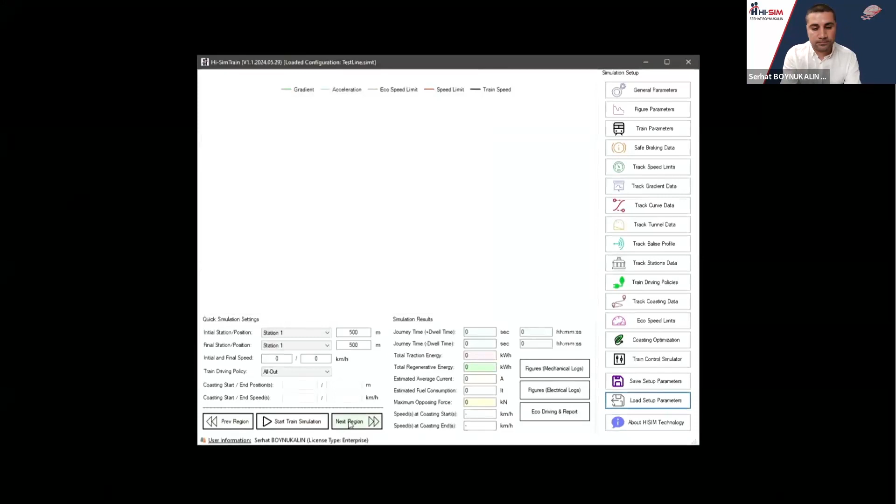Hello, today we will try to introduce the Hi-SimTrain application to you. The Hi-SimTrain application is a specialized program developed for electrification and operation optimization of railway vehicles. Before providing a detailed introduction to this program, it is beneficial to examine the creation of the necessary data sets for the operation of the program. First and foremost, determining the general parameters is crucial.

The sampling time of the application, the maximum simulation duration allowed for a single request, the metering precision of the application output, how closely the speed limits will be monitored, standard gravitational force, the starting point of the line, west, the ending point of the line, east, the elevation value of the starting point according to the direction of the line, selecting the direction of the line as west to east or east to west. After selecting the direction of the line, it is beneficial to check the elevation value because this value may vary depending on the direction of the simulation.

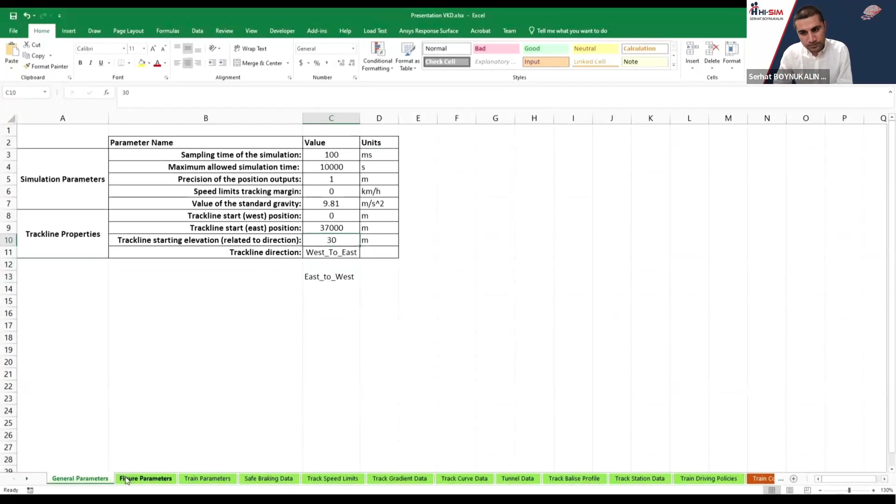The next area we need to examine is the section where detailed settings for the lines drawn on the screen graphs are located. In this area, frequent changes are not necessary. In fact, for your convenience, the most optimal color options and details for the vertical and horizontal axes have been set as default. Still, if you wish to make a change, there is a screen where you can modify the RGB values. Not only the RGB values, but also the modification of the texts on the X and Y axes is possible.

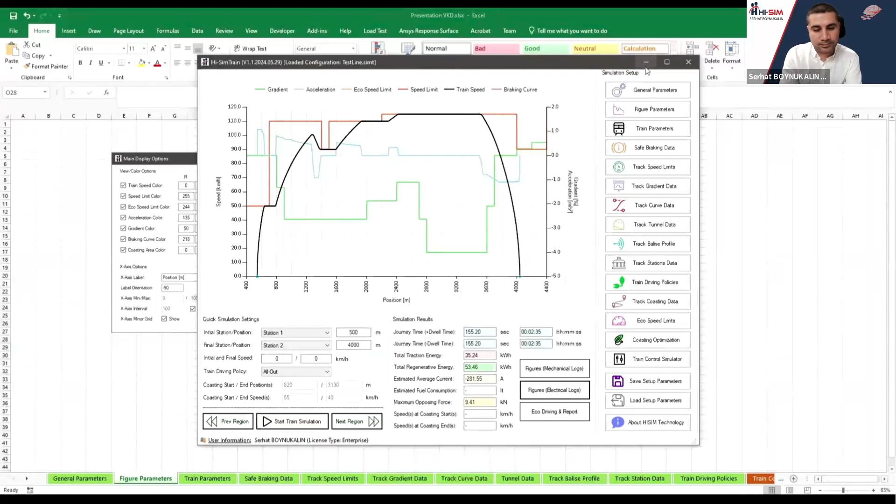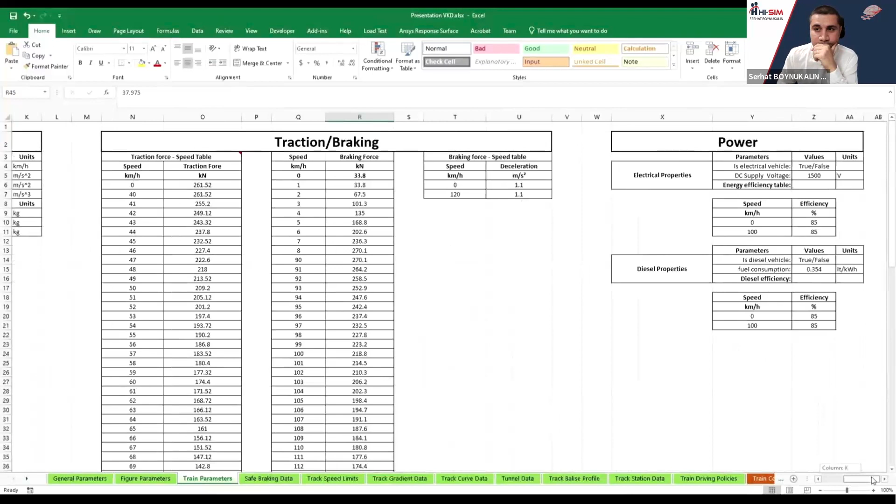The next section we need to review is the part containing the train parameters, which include the most crucial parameters. This section includes mechanical, movement, traction, braking, as well as power parameters. In the mechanical section, the structural parameters include information such as the length of the train, the frontal area of the train, and the number of cars and axles in the train.

In the mass parameters, it includes the mass of the locomotive, a logic variable indicating whether the adhesion effect will be considered or not, the total mass of the train in the simulation, the empty train mass, the maximum load the train can carry, and the percentage value of the mass rotation factor.

Additionally, the train parameters also enable a copy-paste feature that facilitates the easy transfer of train data between two different Hi-SimTrain applications. In the Performance Parameters tab under Movement Variables, it allows inputting the maximum speed, acceleration rate, deceleration rate, and the comfort factor. In the Mass Parameters, there is a field that takes input data dependent on the Davis coefficients AC0, AC1, and AC2.

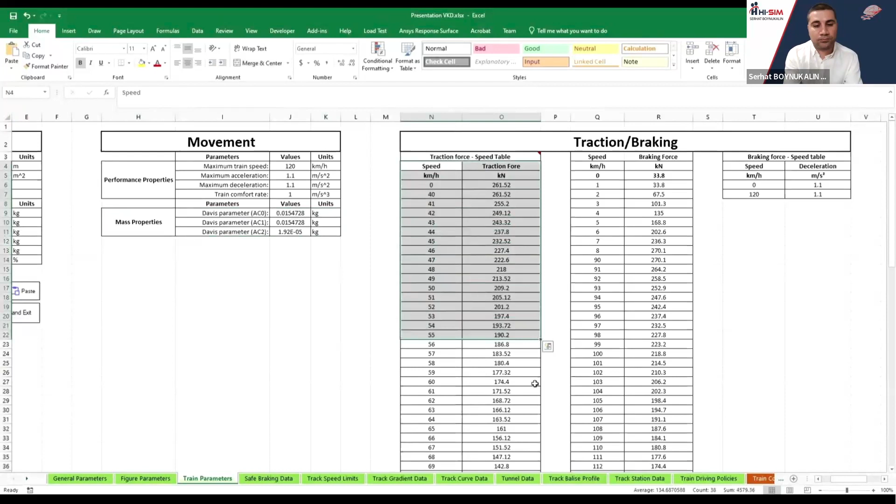The next input field is where train acceleration and braking parameters are entered. Firstly, the maximum traction force that the train can apply corresponding to speed must be prepared for the program in a tabular form. Following that, similarly, the maximum braking force that can be applied corresponding to speed must be prepared for the program in tabular form.

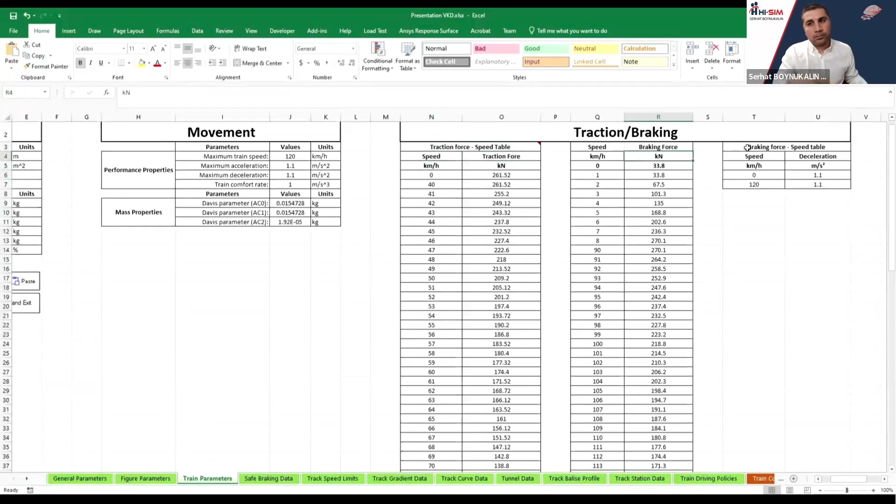Here, instead of the maximum force that the train can apply corresponding to speed, if provided by the manufacturer, the acceleration value corresponding to speed can also be entered into the program in tabular form. Finally, in this field, the braking deceleration value corresponding to speed can be entered as shown. If there is detailed information regarding the braking deceleration value corresponding to speed, it may be prepared for the application as a table.

When looking at the inputs for power values in the train parameters, if the train is selected as electric, voltage value and efficiency data based on the vehicle's speed should be entered for energy calculations. In the case where the vehicle's diesel model is selected, diesel fuel consumption and efficiency data should be entered in a similar manner.

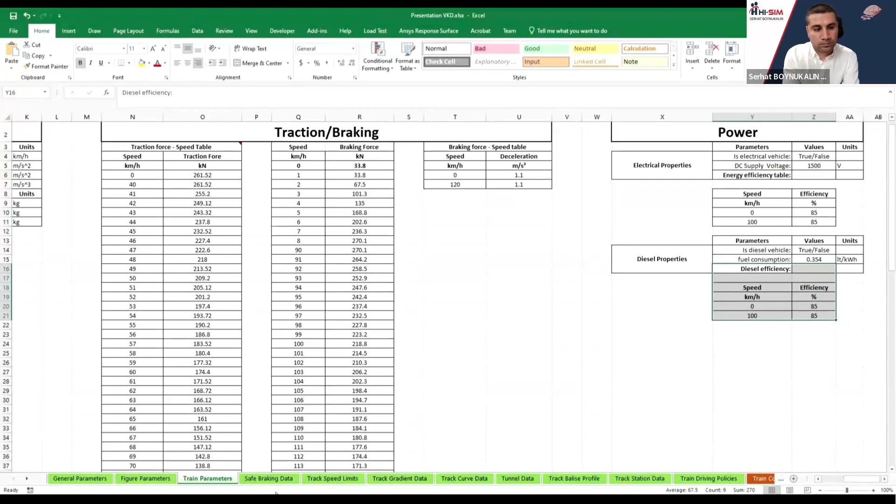The next data entry area is where safe braking models are selected, and the necessary data is entered when required. Firstly, there are three types of braking models. The first one is a local algorithm that approaches speed limits as closely as possible to the vehicle limits without using any braking model. The second model is for CBTC systems, and the third model is for ERTMS systems, defined according to the subset 026 standard.

In the braking model defined for CBTC systems, the following parameters need to be entered as a table: runaway time, coasting time, position uncertainty, speed uncertainty ratio, whether the speed will be normalized or not, and the track speed limit along with the gradient acceleration data.

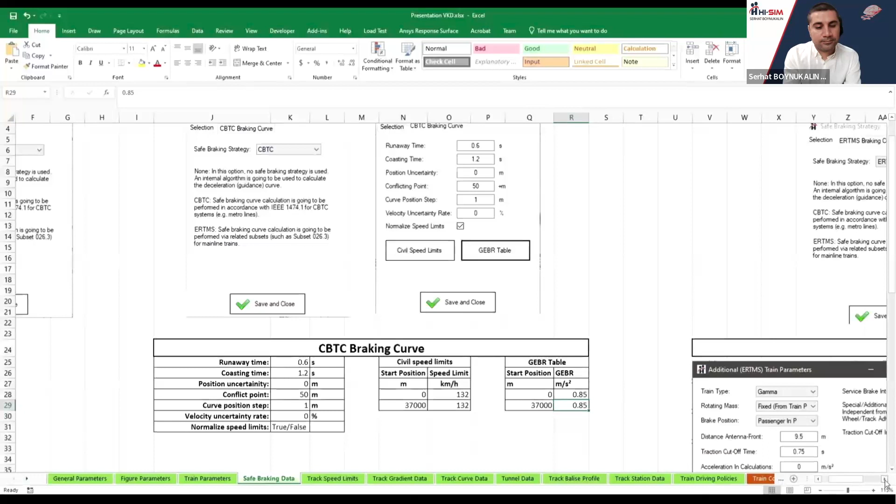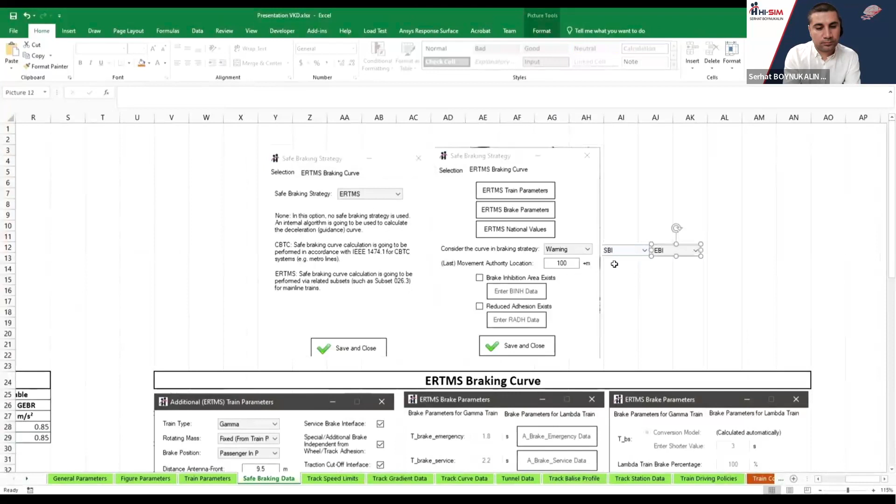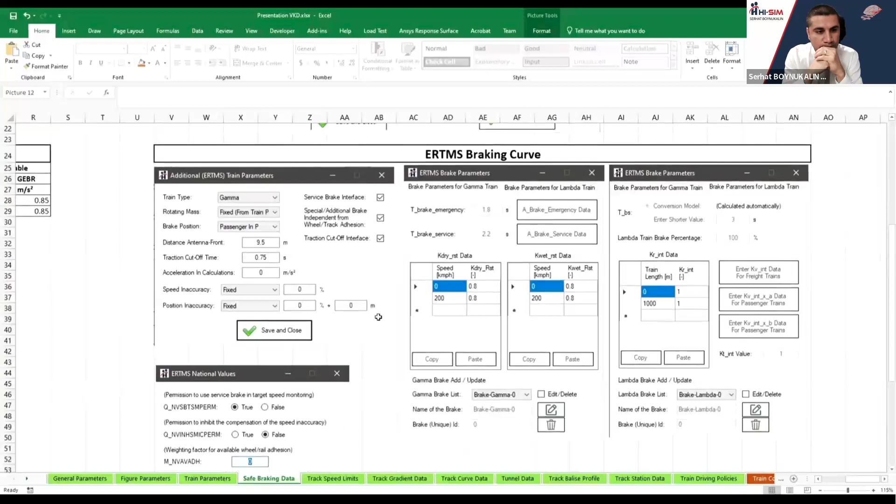In the ERTMS section, there are detailed parameters, each of which affects the output of the application. It can be selected whether the train will follow the warning, service braking, or emergency braking strategy. The train parameters section contains many variables within itself. Similarly, braking parameters and national parameters contain different variables. Each of these should be carefully selected.

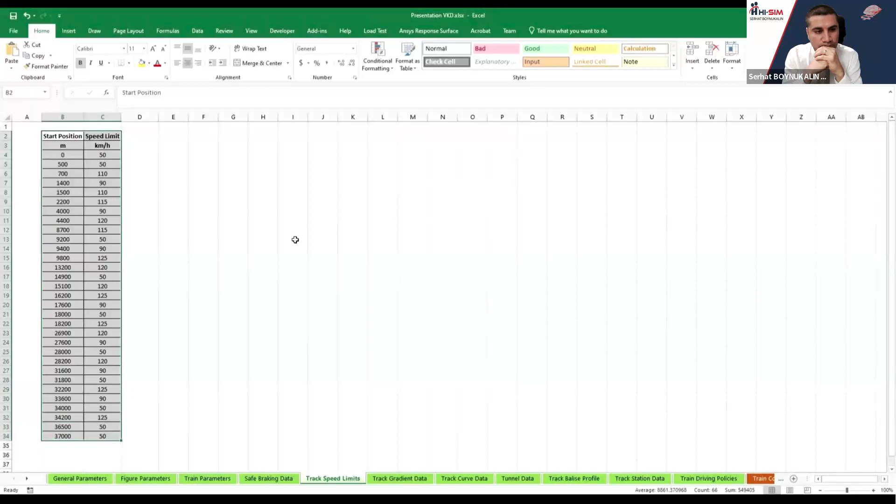The next data table is our table containing the speed limits of the line, which are generally determined during the design phase. Here, for each section of the line, the maximum speed at which vehicles can move is given in relation to the distance of the track. The data can be easily transferred into the application using the copy-paste method. It should be noted that this table should only change if the track line is physically modified, which is not expected in general. Our next table is the track curve data table.

In this table, where curves on the track are entered based on radii, if the vehicle is moving on a straight track, a very large curve value is entered to perform calculations. In our next data table, the variation of tunnel coefficient, depending on the meter, is entered into the table. This value can be selected between 1 and 2. When 1 is entered, it means that tunnel effect will not be taken into account. When 2 is entered, it should be known that the tunnel resistance will be considered maximum. Additionally, tunnel data can also be entered in a segmented manner.

Our next table is the track balises and their location accuracy data table. In ERTMS-based simulations, this data is crucial. It can be ignored in simulations where CBTC or internal braking protocol is considered.

Our next table is the table containing station data. In this table, the long name of the station, the short name, the direction of movement, the start, end, and middle points of the station, the minimum travel time, the travel time in full power mode, and the maximum travel time, how long it can go in eco mode, are entered as inputs, along with the waiting times at the station.

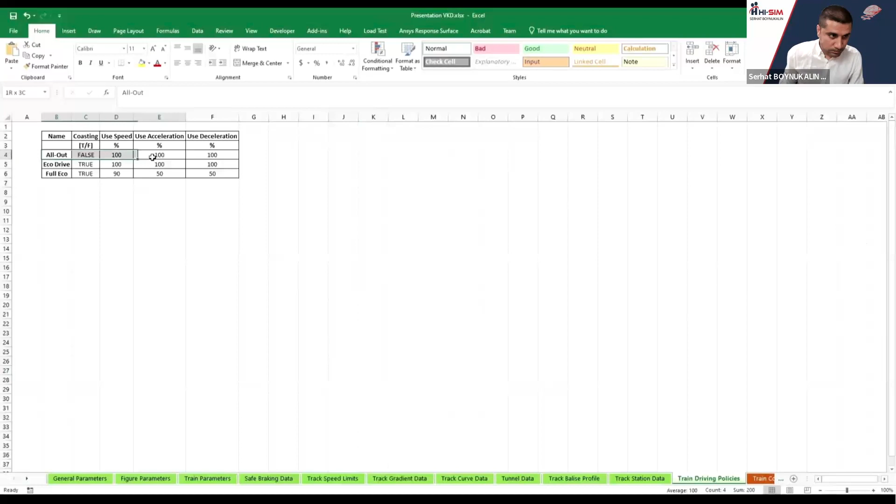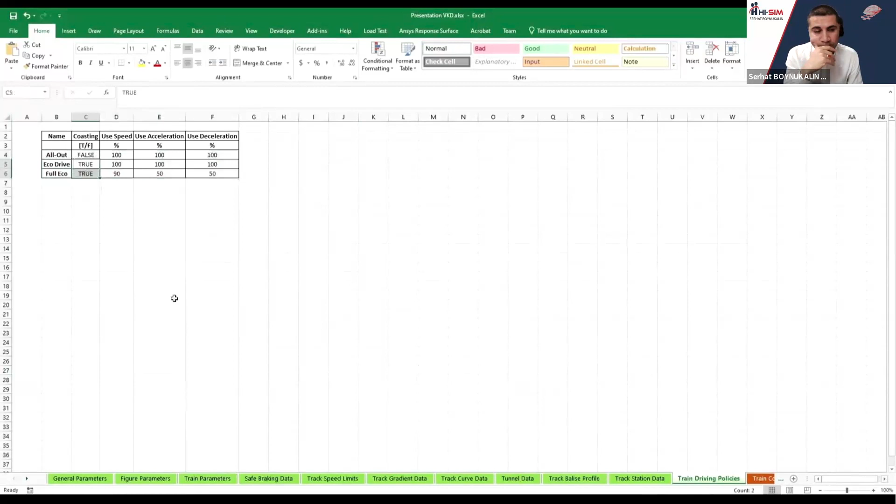In this table, the details of how the train's speed, acceleration rate, deceleration rate, and coasting parameters will be used are determined. The percentage at which speed, acceleration rate, and deceleration rate will be applied, as well as whether coasting mode will be enabled, can be selected.

In full eco mode, the speed, acceleration rate, and deceleration rate might be restricted compared to other modes, as shown in the table. This work shows the progress of data book preparation. Thank you for your listening.

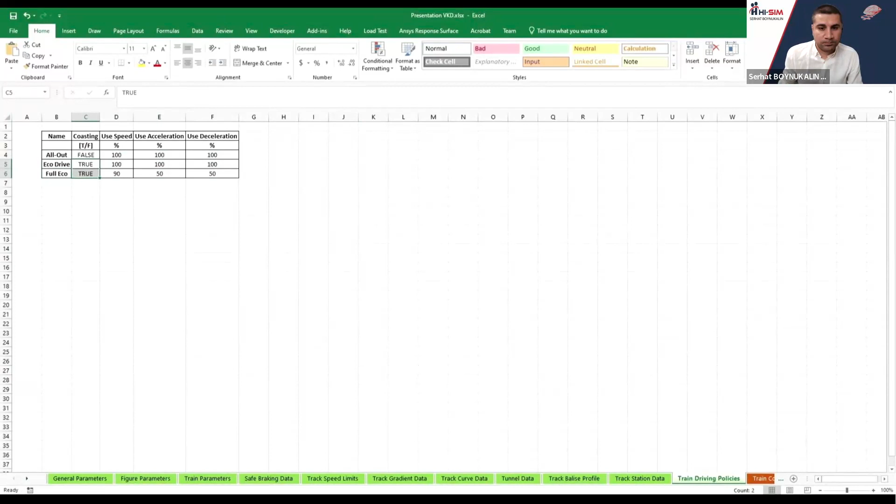Now we have shown you the necessary data requirements for the application. In case you do not have any questions, we will start presenting a demo, a video demonstration of how to basically use the application.

Hello, everyone. We will examine the general parameters, train and track data, coasting, and assess the all-out and eco performance modes for the entire line.

First things first, let's load a config file created based on the databook file and see all the data on the application. Here are the general parameters, and you might select the direction of the line. This properties for the scope visualizer options.

You can select any color that you want that will change the related graph color immediately. Also, you might modify the graph axis.

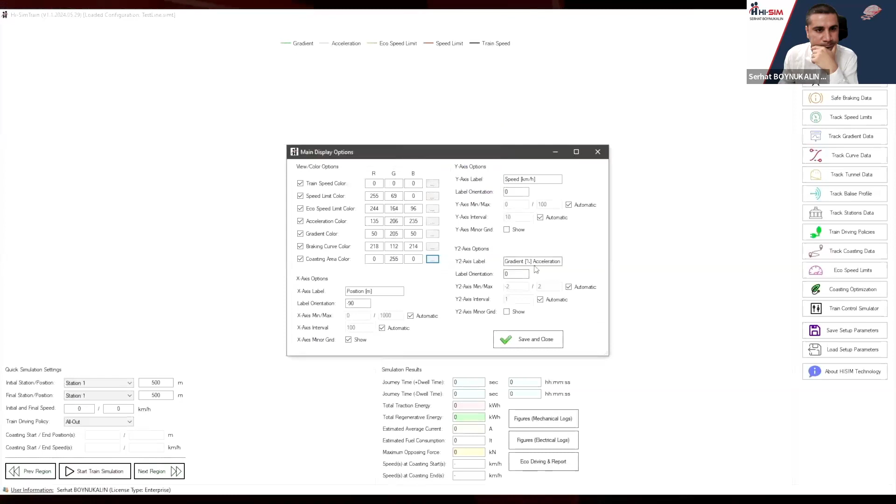The following window shows the train properties. As shown in the databook file, train properties consist of mechanical, movement, traction braking, and power. Also, the train properties might be copied and pasted like we did to send to another Hi-SimTrain application.

A traction force versus speed table or acceleration versus speed table for the traction side is possible. We preferred traction forces versus speed table in this config file. We have an excellent property here to help optimize traction force power usage, which you might like to use in case a train loses one of its engines.

For example, in case a train loses one of two engines, we can write here 50% to simulate half the power of the traction force. Also, here is the braking force versus speed table, and here is the deceleration versus speed table.

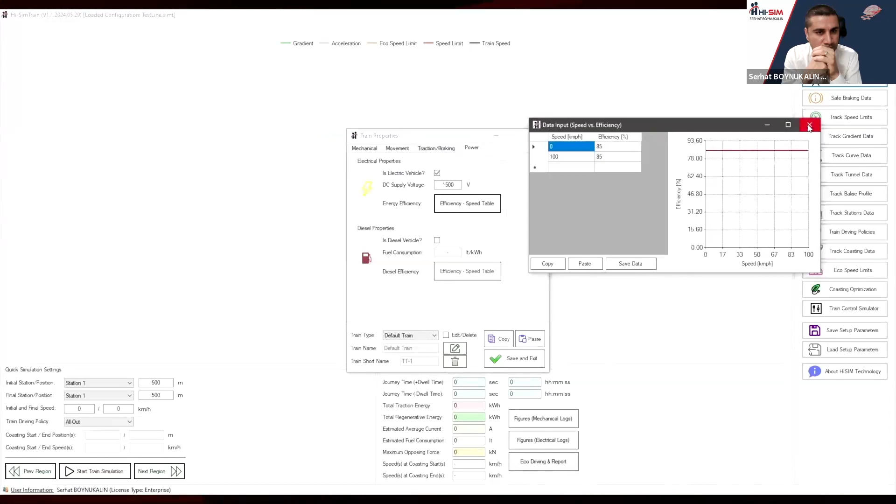In the power section, you have the option to choose between electrical or diesel power sources. Each option comes with its own set of efficiency tables, allowing you to make an informed decision based on the performance and efficiency metrics provided.

The next property is safe braking data, which allows the selection of internal CBTC or ERTMS braking curve algorithms.

Here are the CBTC properties and data tables. Speed limits and GEBR tables might be modified related to the project.

Let's go into detail on the ERTMS parameters. Here are the ERTMS train parameters. Here are ERTMS brake parameters for gamma trains, which consist of multiple parameters and tables.

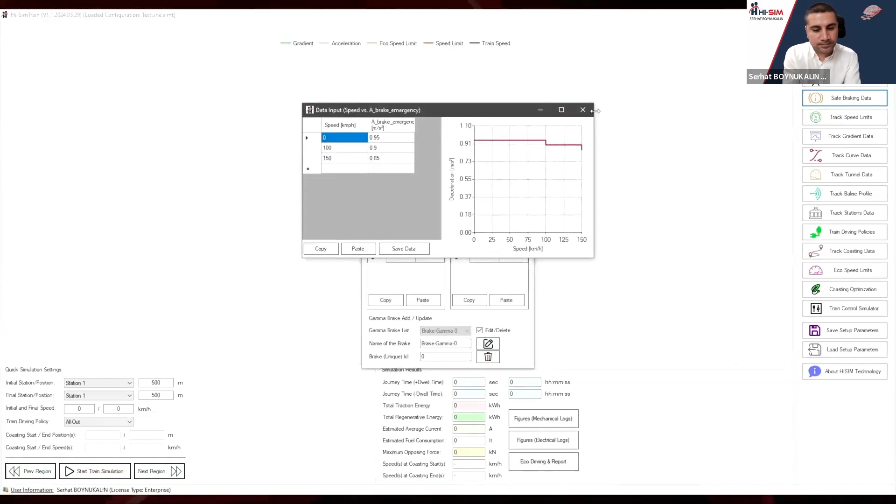It can be modified by selecting the Edit checkbox. A brake emergency data and a brake service data table are entered in tabular form. In case the edit is finished, don't forget to uncheck the Edit checkbox.

Here are ERTMS brake parameters for lambda trains, which consist of multiple parameters and tables. The displayed content is in an organized tabular format. This layout enhances readability and emphasizes the functionality that allows users to effortlessly copy and paste all related data directly into this interface.

Here is another ERTMS dataset, national values, which can be modified easily. It is supported to simulate warning, service brake, or emergency brake algorithms for braking curve calculations.

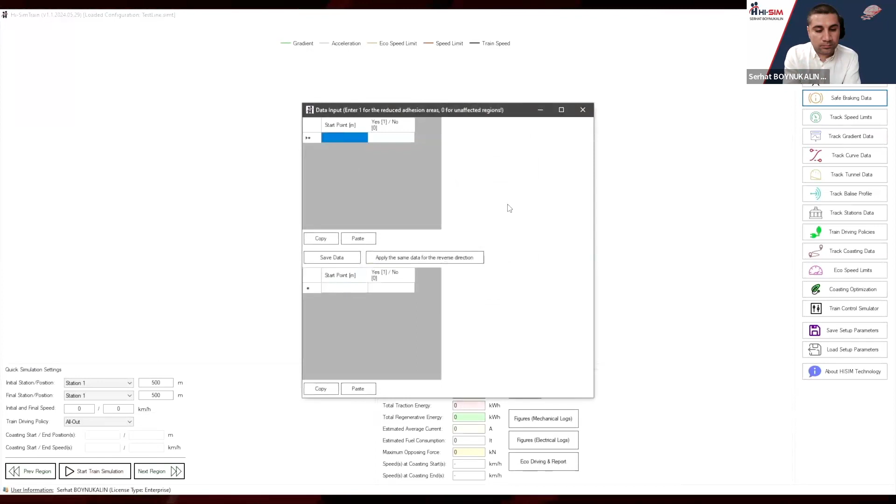In case of needs of brake inhibition and reduced adhesion properties, all related data needed to be prepared in tabular form. This was a quick check for ERTMS properties. We will test it in detail, or you might test it on your own too.

Let's dive into trackside data by starting with track speed limits. The position versus speed restriction information is clearly organized in a table format.

If you have a single line and want to reverse all the data to simulate the reverse side, there is an easy solution for this case. Before I show you that, remember to select the reverse side selection in the general parameters and save it.

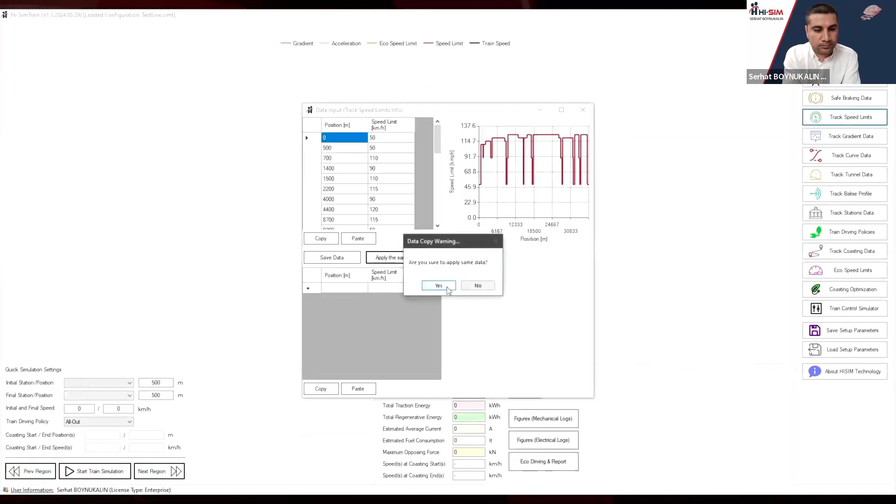Now, let's see how easy it is to reverse data. Clicking the Apply the Same Data for the Reverse Direction button will generate the correct data for the reverse side. And this works for all trackside data. Now, let's see the gradient data.

And clicking the Apply the Same Data for the Reverse Direction button, same as before. So,

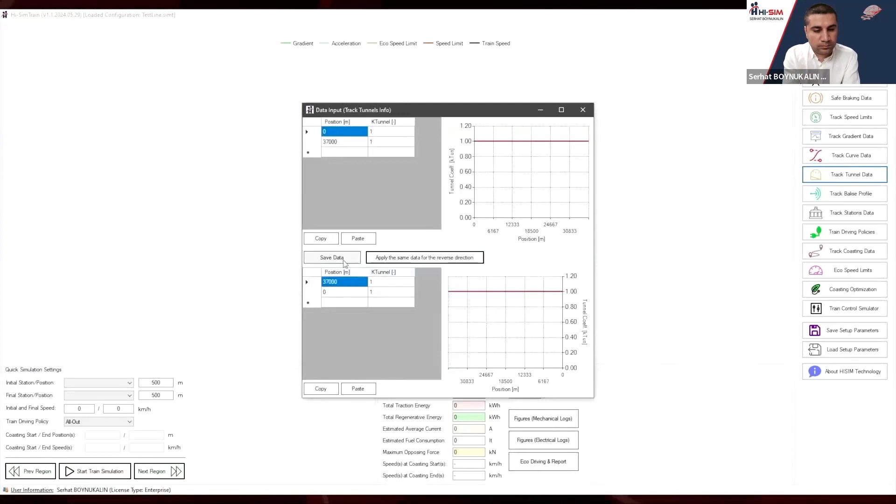Let's do this operation next to track curve data, tunnel data, and balise data, which is only taken into account in ERTMS-based simulations. And lastly, station data can be easily generated for reverse simulation.

Next, train driving policies are shown in tabular form, which displays the characteristics of train driving. It can easily define a new driving policy. In this case, you have infinite possibilities.

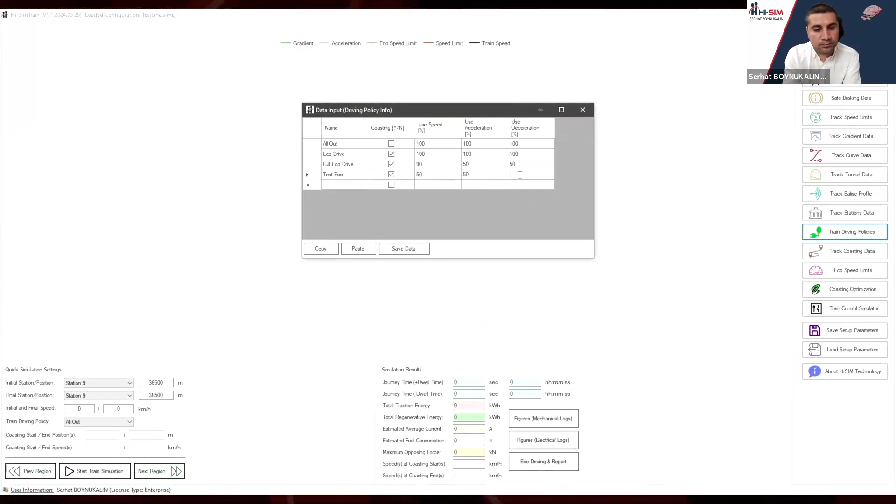Let's write in test property. You can change the use percentage of speed, acceleration, and deceleration values. As you see, we selected 50% for all parameters. When saved, it will show up at the train driving policy combo box. Now, it is possible to use it in the simulations.

In the energy efficiency section, the best parameter is coasting, which we proved with our multiple academic publications. If you do not read them, you should be. There is no one-click solution to reverse all data for this property. However, we have developed an enhanced algorithm to find coasting points easily. We will give more info at the coasting optimization side.

Let's add a test value to the reverse side of the simulation table to demonstrate manual editing. The value should include the following information: direction, train type, coasting start and end points, coasting start and remotoring speeds, along with a note that will be used in the report to inform the driver about necessary adjustments for optimal performance.

So, let's save this and move forward to the next property, which is eco speed limits. It is generally most useful to apply at the end of coasting or when reducing maximum speed.

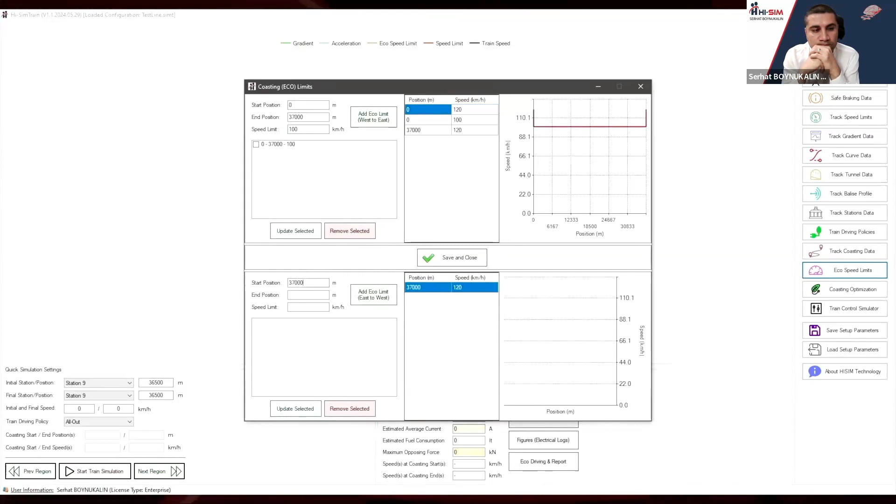Let's add a sample speed limit that reduces the maximum speed from 120 to 100 kilometers per hour for the entire road in both directions in the eco profiles, effectively enhancing safety and reducing emissions. Remember, these speed limits only apply to eco profiles. To add speed limits to all out, you need to update the track speed data.

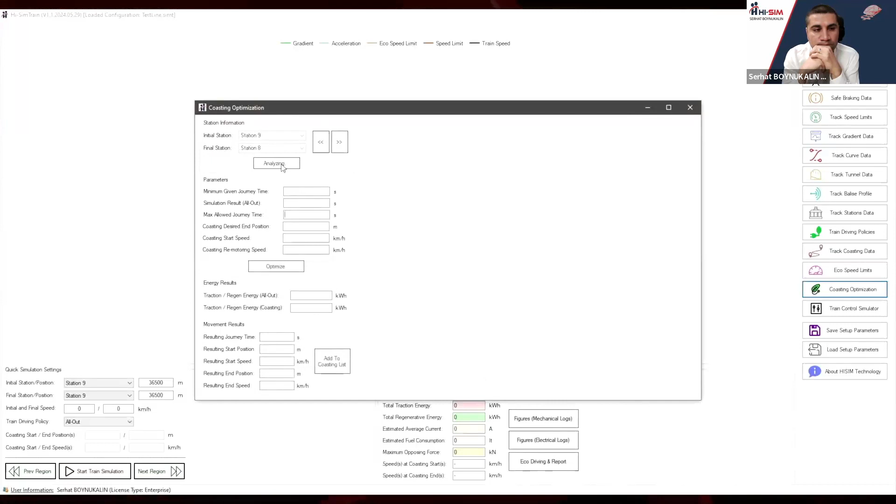Let's save this and review the coasting optimization parameters. First, it needs to initiate the data of the station, which will be used to calculate coasting points. Next, to prepare for coasting points, we need to allocate 121 seconds, which the all-out scenario needs at least that time, and then add an extra 10 seconds. Once we determine where the coasting will finish, we can request optimization to find the location.

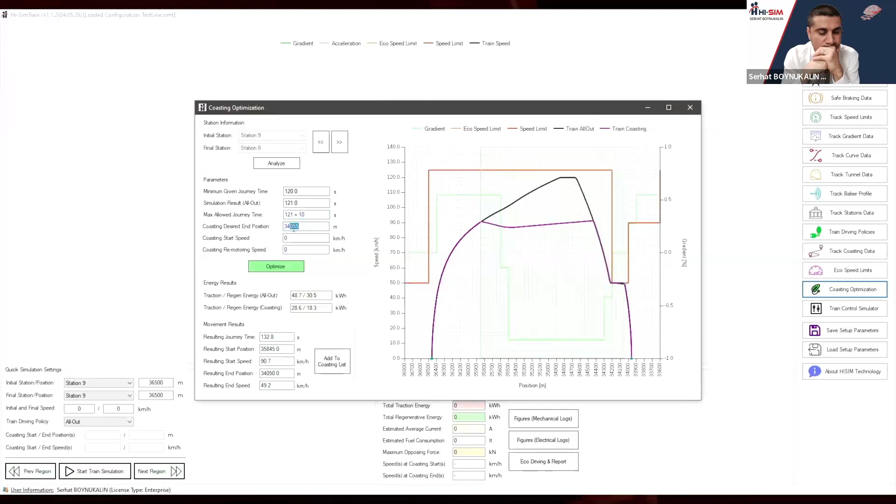As you can see, the vehicle actually finished coasting at around 34420. Rearranging the coasting end position and then starting the optimization will produce optimum results within a 10-second margin. When optimum coasting points are generated, they can easily be added to the list by clicking the Add to Coasting List button. So, we generated reverse track data and demonstrated how to optimize coasting data.

Now let's optimize in the normal direction as well. Let's analyze the data from Station 1 to Station 2 for coasting operation. As mentioned earlier, let's allocate time as all-out mode is needed and some extra margin to calculate the optimum points.

As you can see, 3200 is the optimal point to finish coasting. Let's add it to the endpoint and rerun the analysis, which took a total of 173 seconds and resulted in a decrease in energy consumption from 35 to 9 kilowatt-hours. Let's add this to the list of key points and check to ensure it was added successfully.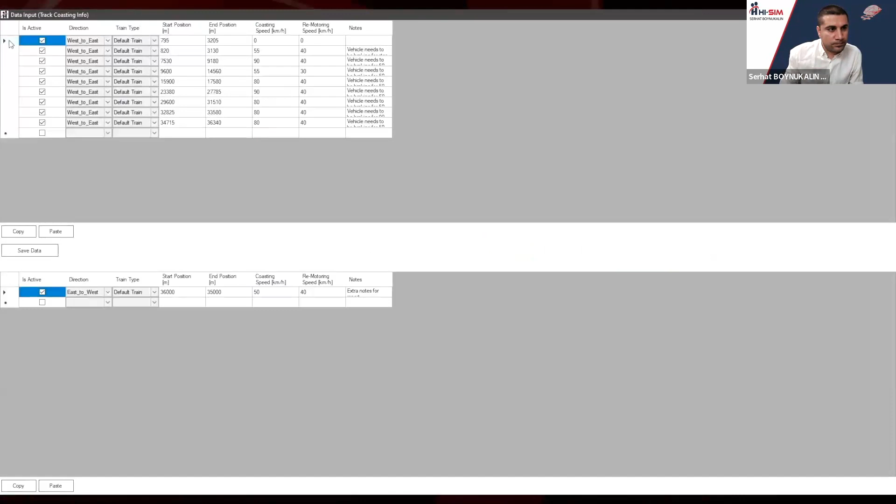At the top of the list, you can see the most recently added points of coasting points. You also have the option to add a note to support the reporting process. Due to the fact that we have similar coasting points for that area, let's remove these points.

General parameters, train and track parameters, and eco-friendly properties have been addressed. So finally, we are ready to proceed with the simulations. Let's simulate the complete line in all-out mode. As you can see, it was simulated very quickly.

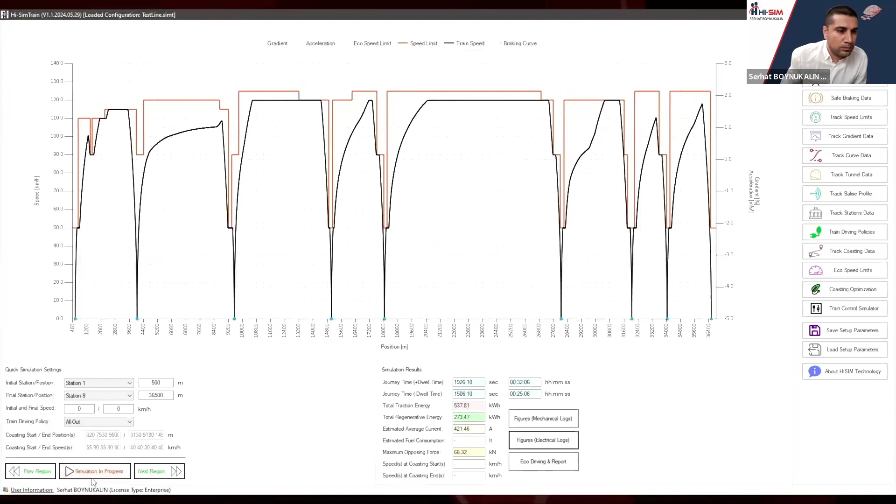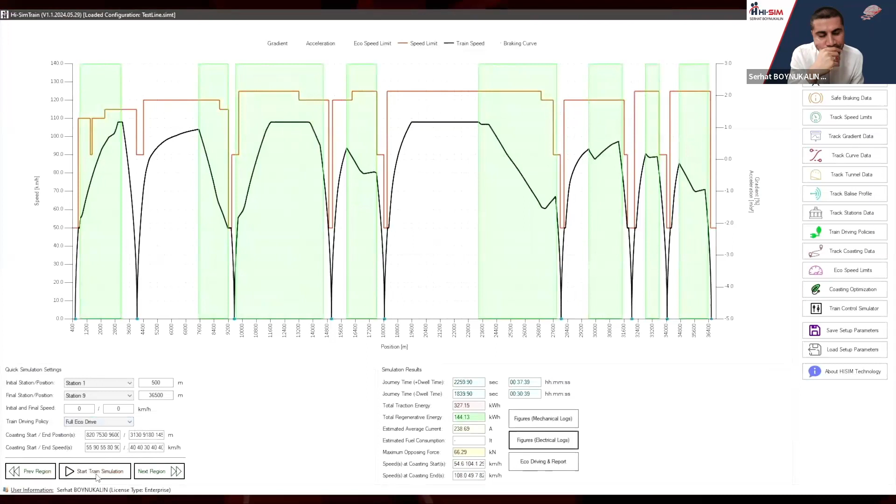Full eco mode reduces energy consumption, but it is not as efficient as eco mode, which restricts acceleration values, but leads to too much time consumption. As previously mentioned, the potential for different modes is infinite. The performance will change with different gradient values. You may have the opportunity to find the best one for your project. That's why we offer this application to all types of authorities.

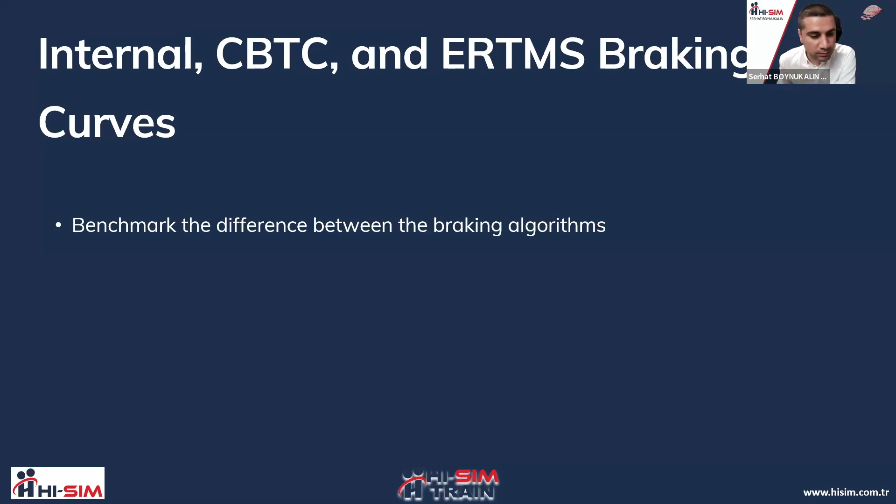Hello everyone, we have news for you. If you want to simulate different braking model algorithms, Hi-SimTrain is for you. It supports CBTC, ERTMS, and an internal braking algorithm. So let's get started on the examination of the application based on this subject.

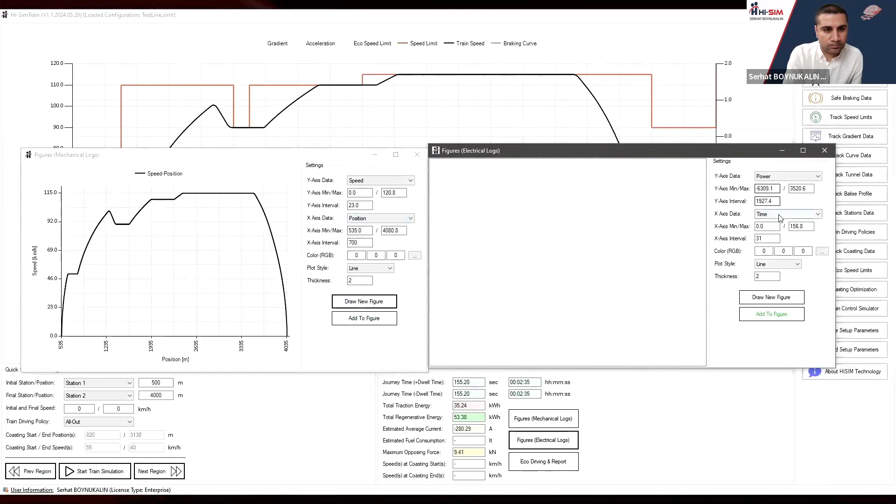We start with the internal braking algorithm. Let's simulate and see its effect. We opened a mechanical and electrical log window to add results.

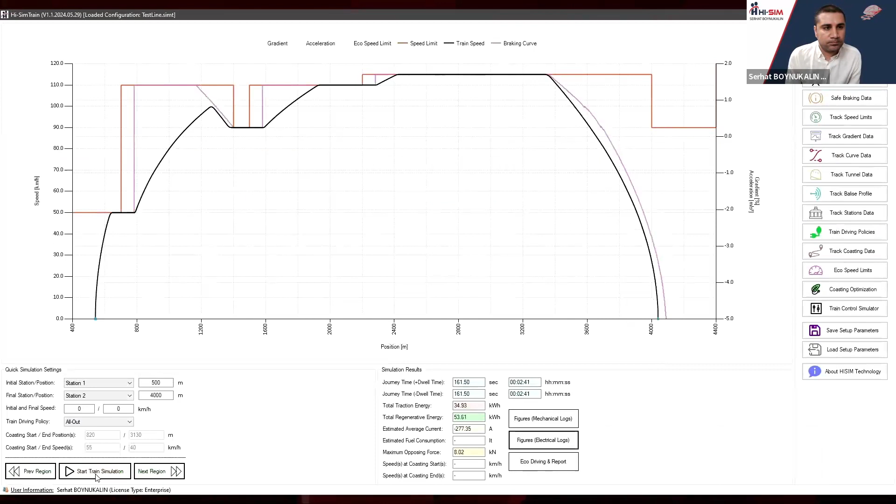Firstly, we added speed and power versus location output for the internal braking model algorithm to the graphs. Secondly, we simulated the CBTC braking model algorithm and added the results to the graphs. Adding graphs on the same axis will help visualize performance more easily, ensuring a clearer understanding.

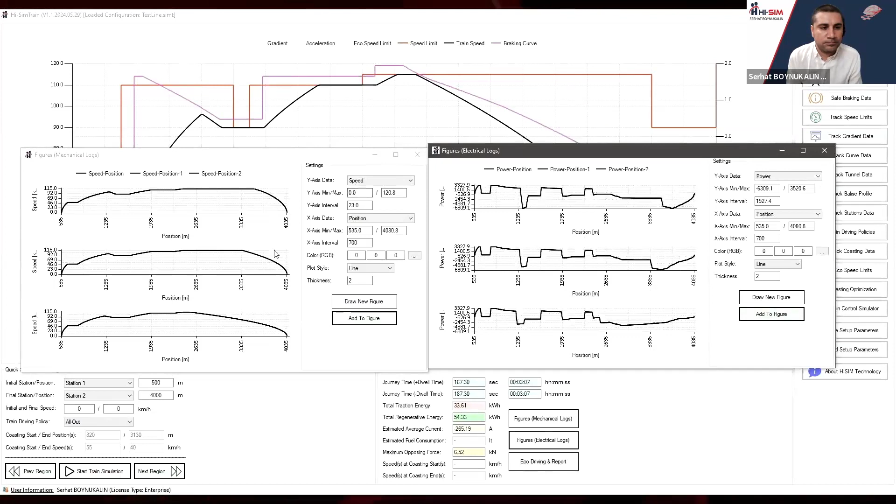So lastly, let's select the ERTMS braking model algorithm from the Safe Braking Strategy tab. The results are here. Let's add them to the benchmark scopes. Now we can see and examine the effect of the difference in the braking models.

As a result, respectively, ERTMS, CBTC, and internal braking model algorithms consume time between stations of 187, 161, and 155 seconds. They also consume different power based on the different braking algorithms. Thank you.

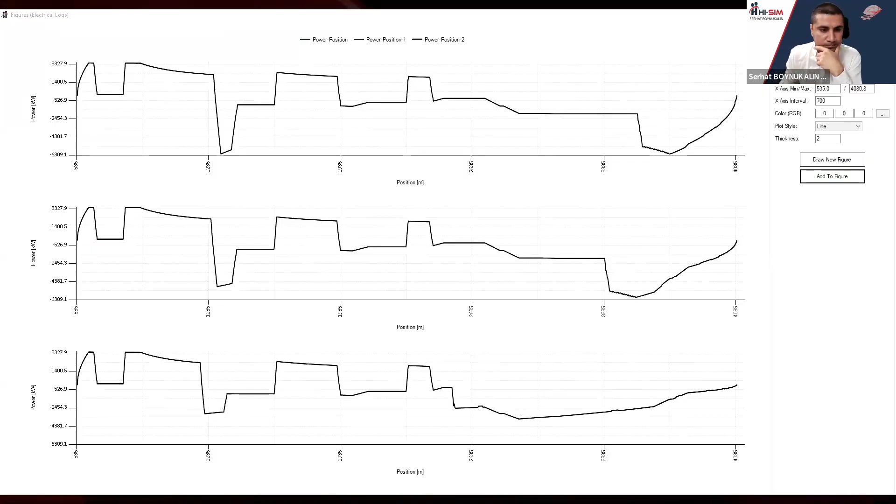So we have shown the braking algorithm difference in this demo. At the end of this, we are going to show you the reporting side of the application. After that, we will start the live demo. Please do not hesitate to ask your questions.

Okay, let's start it. Hello everyone, we will examine the reporting process based on CBTC and ERTMS outputs. Let's open the Eco-Driving and Report section.

It is possible to choose between all modes and benchmark them with each other based on a safe braking strategy. So let's select the CBTC braking curve algorithm and simulate it to benchmark the output of the complete line for all-out and eco profiles. On the reporting side, as a strategy, select all-out versus eco profile, and for the stations, choose from 1st to 9th stations, and then start the simulation.

Before finalizing the report, if it exists, it is essential to add a logo. Please check and write the report's header, title, and other essential details. Ensure that all information is selected correctly and saved in the parameters. The next step is to generate a report based on the report parameters. Let's wait a couple of seconds while the report is generated.

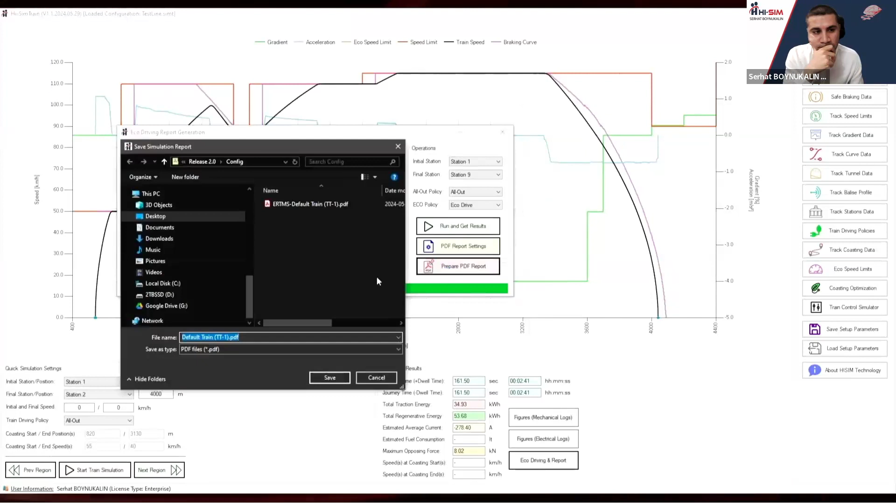Here it is. Save it in the relevant path. We will save it alongside the ERTMS report, which was generated earlier, and we will use it to benchmark reports against each other.

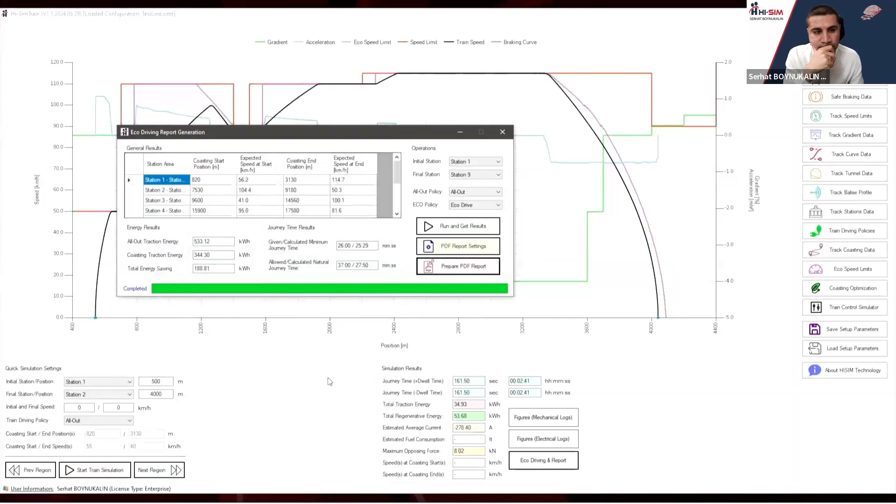So let's bring the PDF reports to the front to benchmark them. Allow us a couple of seconds, please. Here it is. Open the ERTMS and CBTC reports. Let's examine the details of the reports.

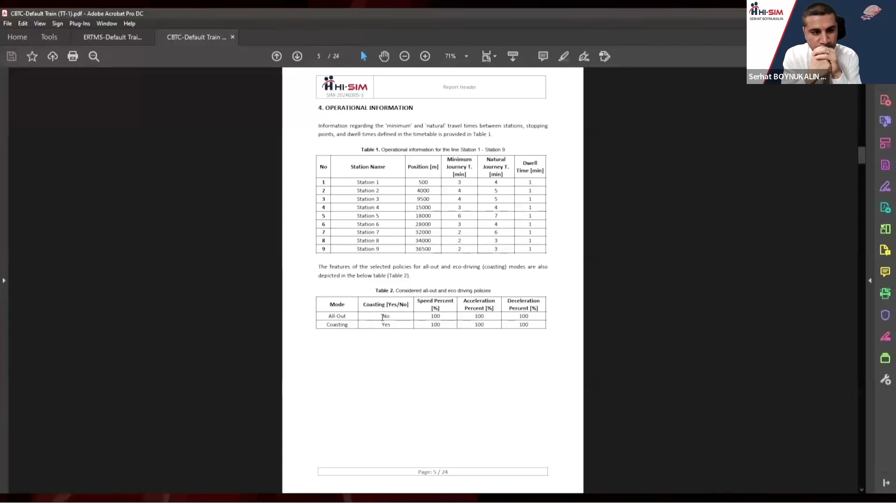You can see the ERTMS report's header, title, and other text marks. Here is the documentation history info. Next, the abbreviation list and methodology explanation. After that, the operational summary has been given, clearly displaying the details of all-out and eco-profile parameters. So based on these requirements, here is the first station-to-station simulation result visualized in the graph.

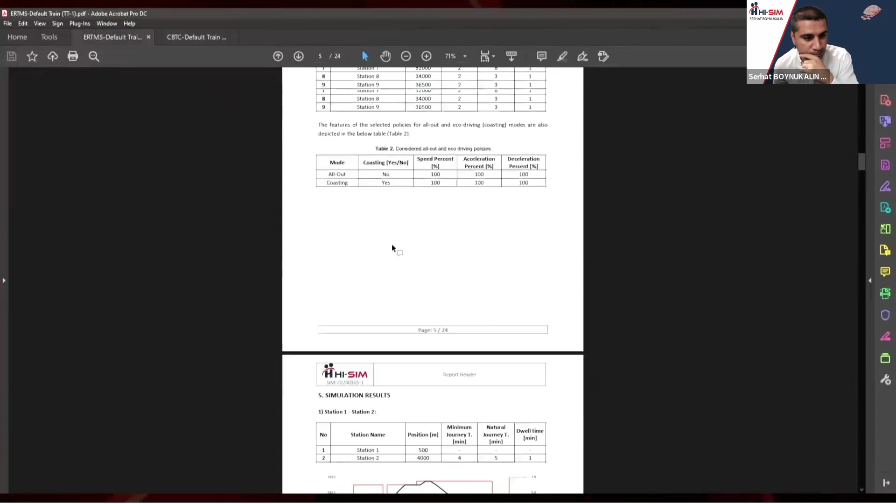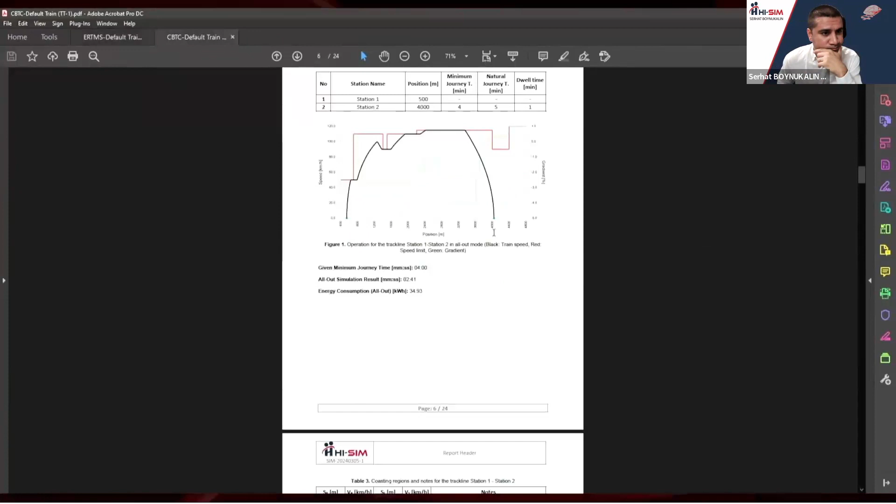So let's examine the CBTC-based algorithm's report too. Opening the same part of the reports will help easily visualize the difference between the ERTMS and CBTC-based braking algorithms. Switching between reports to compare the differences. It is similar to other sections of the report.

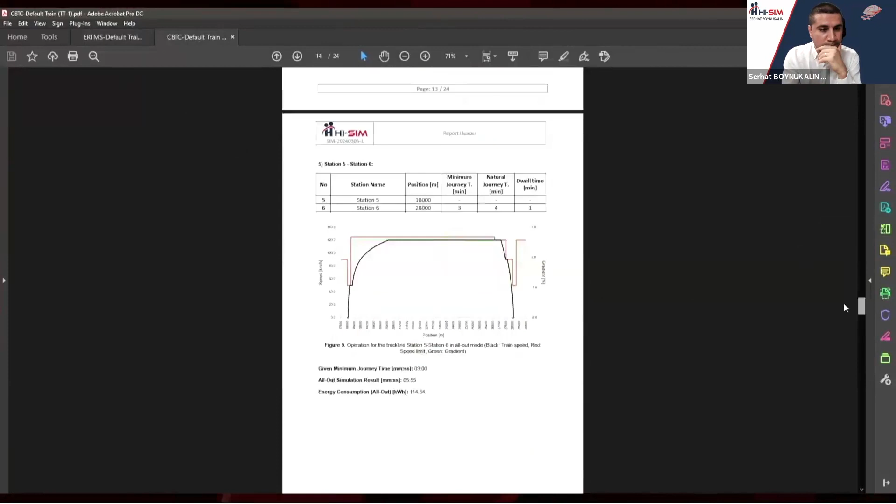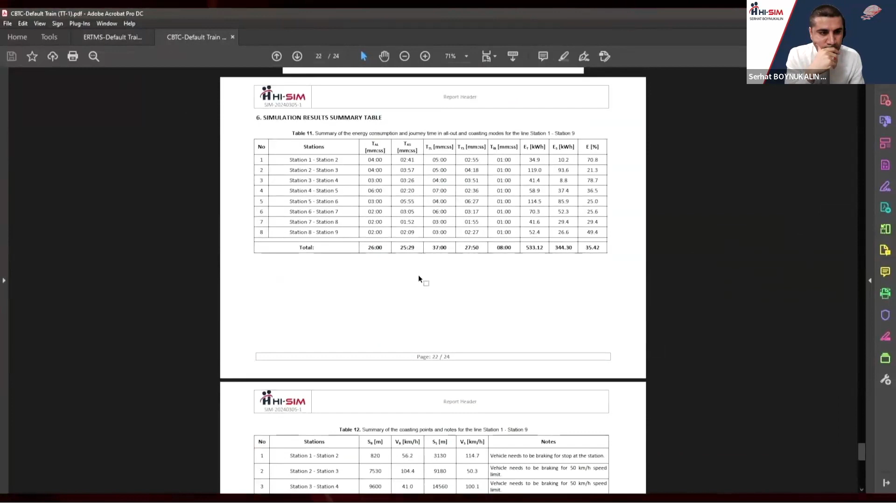Let's move on to the report's final part, which summarizes all the profiles. Here are the general results of the report, which shows energy reduction and time consumption. To compare ERTMS and CBTC: ERTMS takes around 1.5 minutes more time for the entire line, while CBTC is 2.5% more efficient than ERTMS. To be fair, coasting points are not optimized for the ERTMS side.

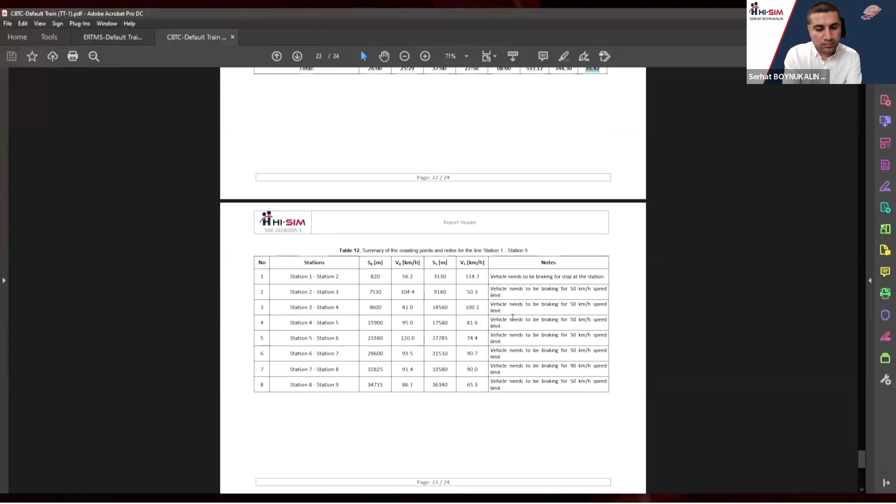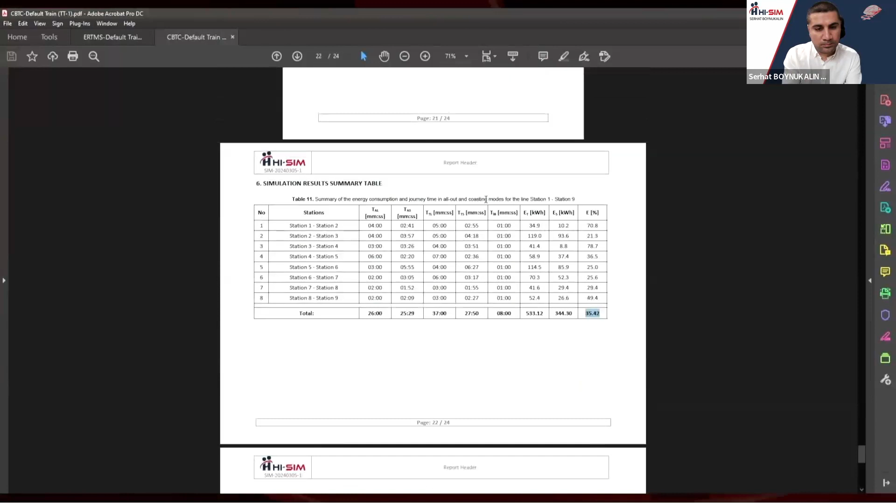In the case of optimization, it might increase energy efficiency. However, drawbacks with timing will continue. Also, coasting and speed limit tables are available in the report. Thank you.

Hello everyone. So we have finished the video demonstrations. We will start the live demo. I guess we have a question.

Simulate multiple track operations - Emre Hocam, if you could answer this one. Okay, so although this software is mainly developed for single train and single track operations, this feature may also be added if requested, because your feedback is very valuable to us.

Okay. We have a couple of questions, but let's answer them after the live demonstration. Now, in case we do not have any questions further, let's start the live demo.

Allow me, maybe I should add a little bit more about that question. As we mentioned, we actually have other software which is quite capable of handling like 10 or 20 different tracks, switches, track circuits, everything can be used. But this program's intention is slightly different. That's why it's lacking, but it's in our mind that maybe we will be adding at least one more track and allowing headway analysis like turn-back headways, introducing switches. That's it. But for very extensive operation analysis, we have another solution, to be honest.

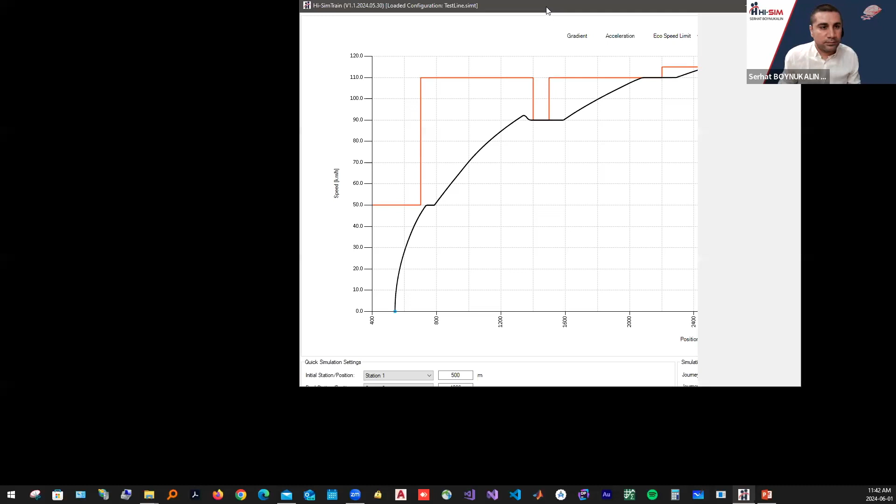Let's disable all of this to see just the speed limit and the train speed and curve. Allow me to open another application. Okay, let's make it CBTC train. Here are the results. As you see, the difference in timing is around 10 seconds if you lost one of your engines, and the power consumption is reducing, as you see, but the regeneration goes down a little bit.

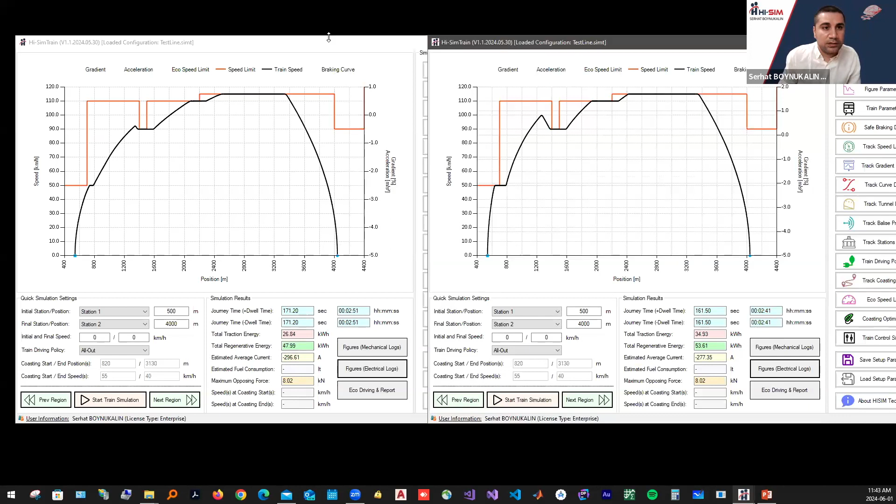We can carry this simulation, for example, in ERTMS too. In all-out mode, actually. And here are the results. In ERTMS, as you expected, the timing is consuming more, around 10 seconds at this point too. And the consumption of energy is reduced a little bit.

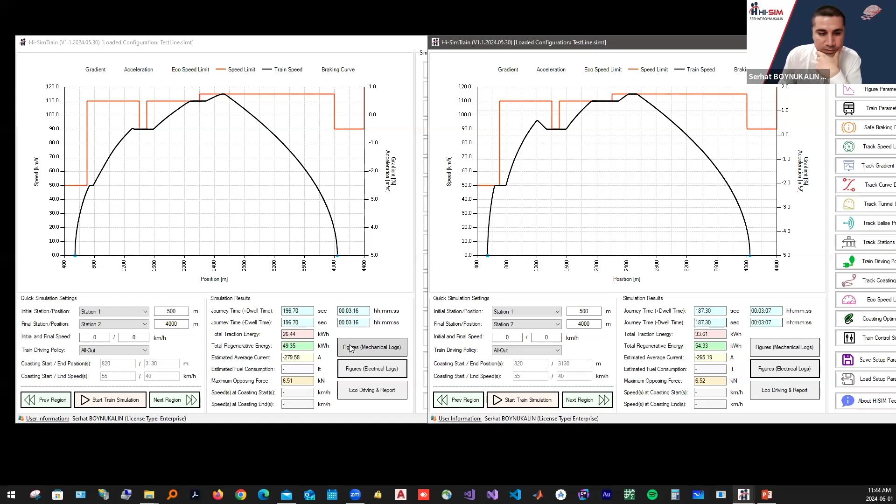So we can carry, for example, another test case here. For example, the gradient of this simulation here is similar to real life application, but if you want to see the effect of, for example, just single engine reducing, we can select, for example, the gradient of the track as zero, a flat line, and see the effect here. We need to select second station.

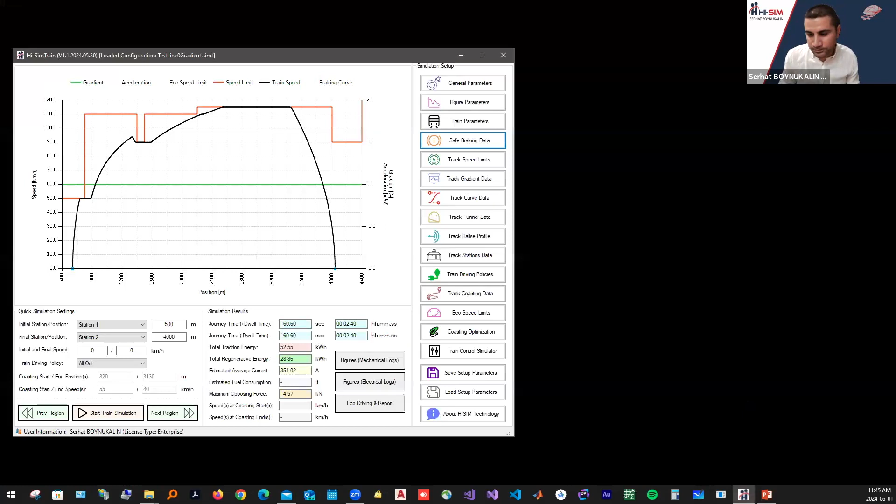And here is the simulation. Just a minute. Let's make it for another application. Let's load the flat line. We carry this into CBTC. What is the train parameter? 100%. Okay. Let's select CBTC and train parameter 50% of traction power usage. Let's simulate.

As you can see, the timing is increased. Power usage has been lowered a little bit, around 6 kilowatt hour, and the regenerative energy is a little bit downgraded. So it has too many possibilities here, but it depends on what you need and what you want to do.

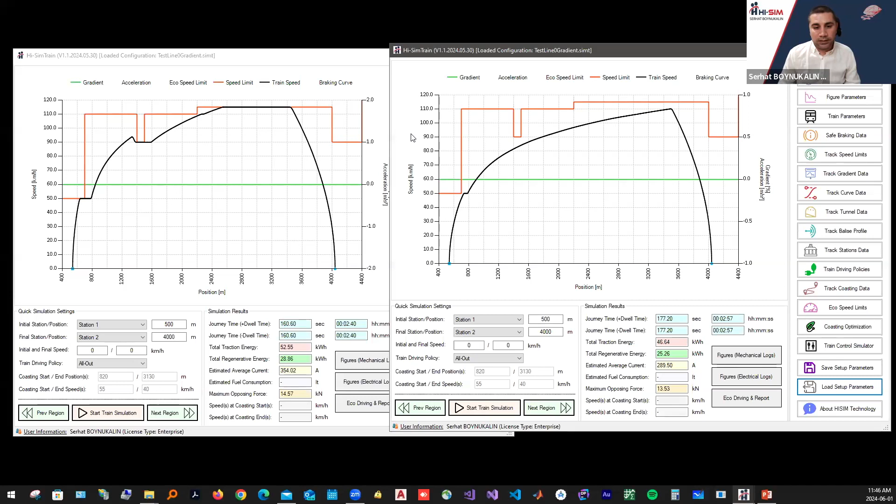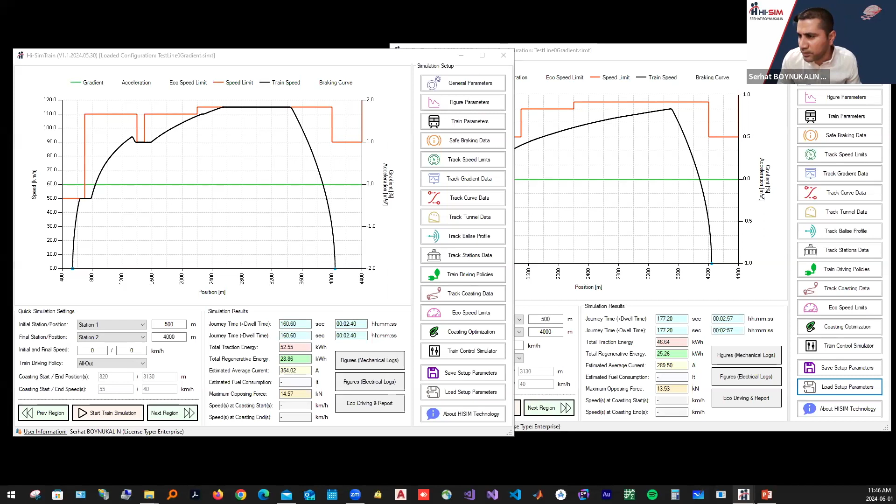However, if requested, we may add such a feature to the program, so we can integrate or we may offer to choose which part of the line will use CBTC signaling and which part is ERTMS. Then we can get the result and also report depending on that property. So yes, we may add this, but for now, for that version of the program, you can also do this by creating different configuration files.

We have other questions. Okay, perhaps I can also answer the coming questions. So as Emre said, for the previous question, we can have integrated CBTC and ERTMS systems. That shouldn't be a big problem. For the moment, you need to do this in different files, but in future work, it's not difficult for us to have them in a combined way.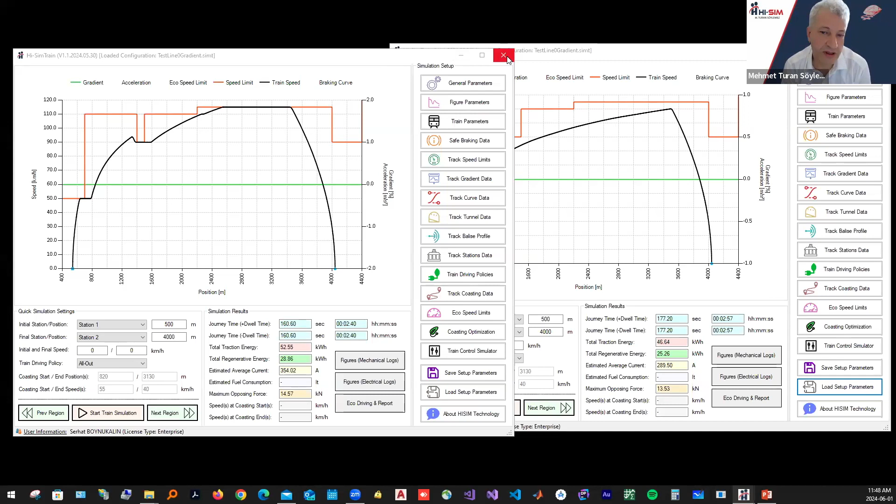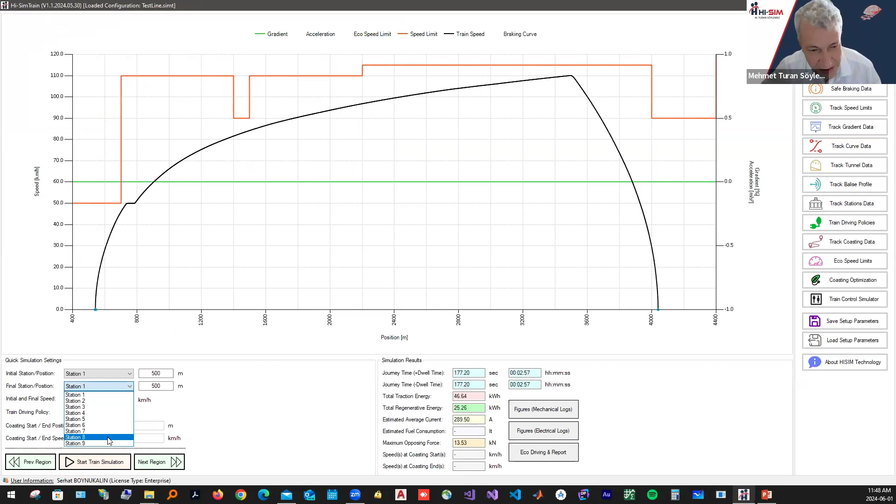There is a question: does the tool determine which signaling system will be best suited for a new line based on the available information? Actually, the tool might help you in such decisions because you can easily examine how the trains will be moving in different signaling systems. Obviously, in the decision-making process there are many parameters, but one of the parameters is obviously the travel times and energy consumption. And as far as these two parameters are concerned, the tool can definitely help you in comparison.

So there is another question where we have multiple questions. The first one is, does the program include the elevation of the stations? Yes, it does actually. You can give all the elevation information of the track, and it's considered by the program.

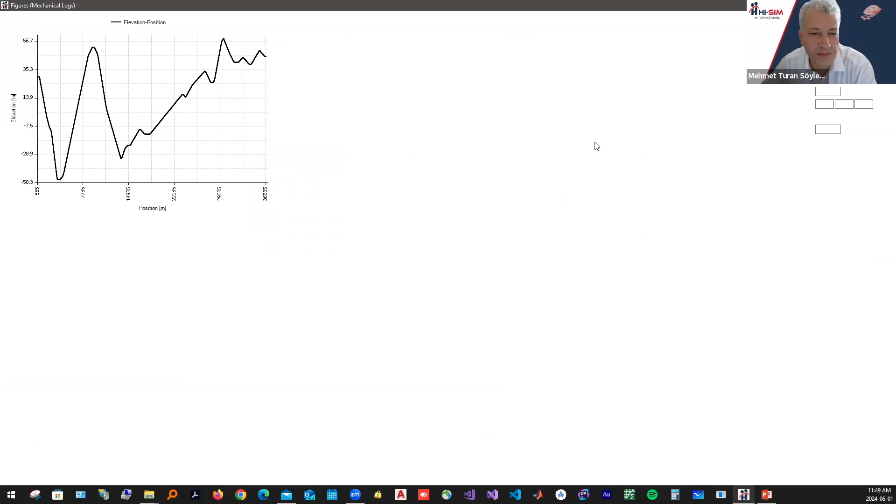The second question is about the comparisons made for only one train. Is it possible to do it for more than one train in order, for example, to monitor power supply efficiency and its effect on the whole power consumption, or is it negligible? As Süleyman mentioned earlier, actually this tool is for movement simulation only. So in the simulations, we do not consider the effect of the power system. So we assume that there is enough power.

However, we have other tools, especially for power simulation, traction power simulation. And in such tools, we can actually simulate the effect of the whole system, the power consumption, etc. But if you just would like to get a quick result about how the trains will be moving in your system and what would be the power consumption, the tool can give you a quick idea.

May I interrupt here, Hocam? I think the question might be also asking, is it easy to change train parameters? If it is the case, yes, you can change the parameters, tractive effort, transition speeds or base speeds. You can immediately see the effect on the travel time. You can see the effect of such change on the energy consumption. If for you the seconds are so important for your operation planning, then you can try tweaking those parameters a little bit at the beginning of a project.

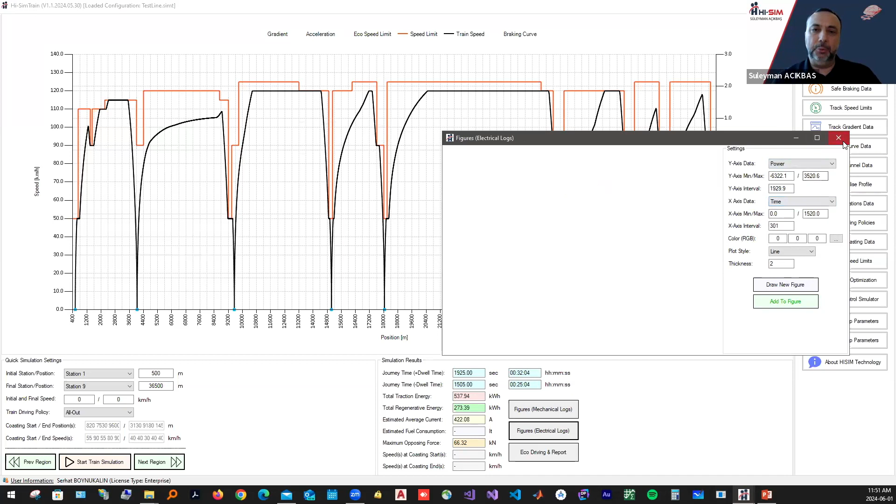Okay, sorry. Turan Hocam, you can continue. Okay, thank you, Süleyman. I believe the questions have been answered.

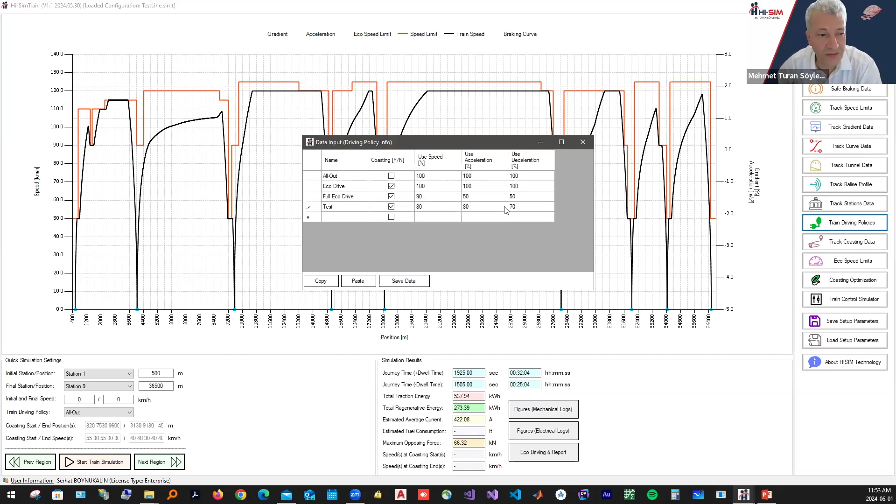For modes, we have to give static inputs beforehand. Can we make a program algorithm to try different modes to find out the best energy consumption? Again, actually, we can do this. Serhat is now showing this to you, that you can try different strategies in a dynamic way, and then for each different type of strategy, you can see your results and see the travel time and also power consumption. So that's one of the powerful sides of the software, actually.

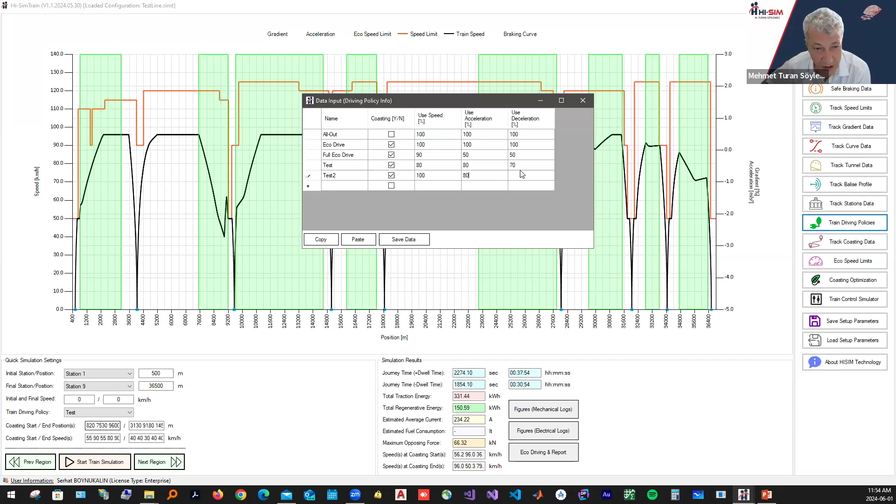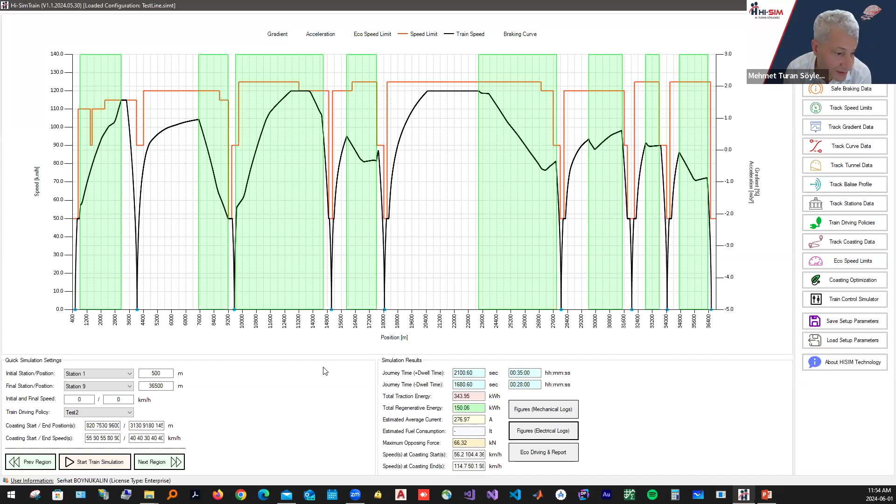The last question is, do we have to give brake force in regards to speed, or is it possible to have profiles for that? Yes, actually, we can provide the brake force versus speed, but this is especially for calculation of dynamic brake force and the regenerative energy calculations. So it's possible. And as far as EN 50641 is concerned, Süleyman has already provided the answer. It's not relevant to this software because we are not really dealing with the traction power system.

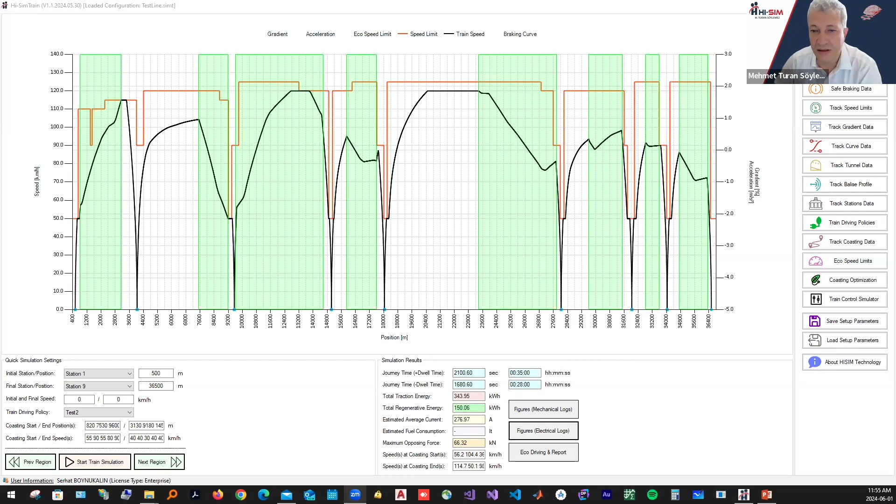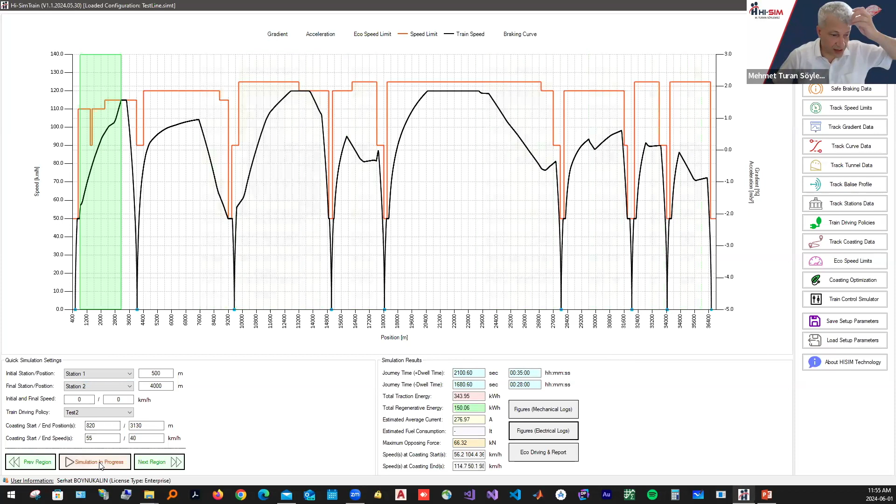However, as far as validation is concerned, perhaps we should mention that we have compared our results with real data in different projects and have shown that the results are compatible with real field values. I believe that finishes our last question. If you have any questions, please do not hesitate to ask again. Serhat, you may continue. Okay, thank you.

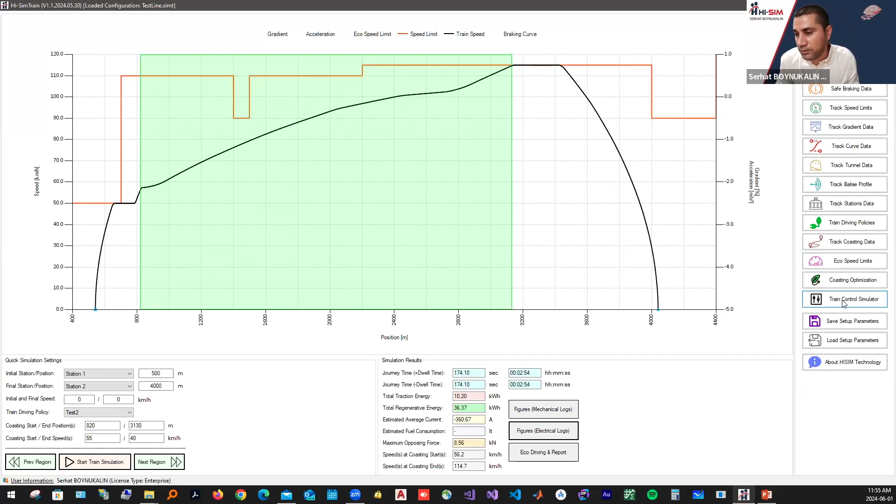So we have demonstrated a couple of possibilities in this application, which has infinite possibilities. And actually, I want to show the last thing. We have train control simulations, which allow us to drive the train. For example, I have initiated the train's data into the system, and let's drive here between station 1 and station 2. Here is our driving policy, and the speed limits, we can put here.

And if you want to see the track gradients, you can see here, and the power curve, but I don't need the power curve for now. When you start the train and put the control input at the maximum level, the train starts moving, and as you see, the black line here is simulating the train movement. For drivers or anyone who wants to know how the train moves and how it works, it is a useful tool actually. In case you do not use it as it should be, for example, we have a huge service brake here. You see the train's movement.

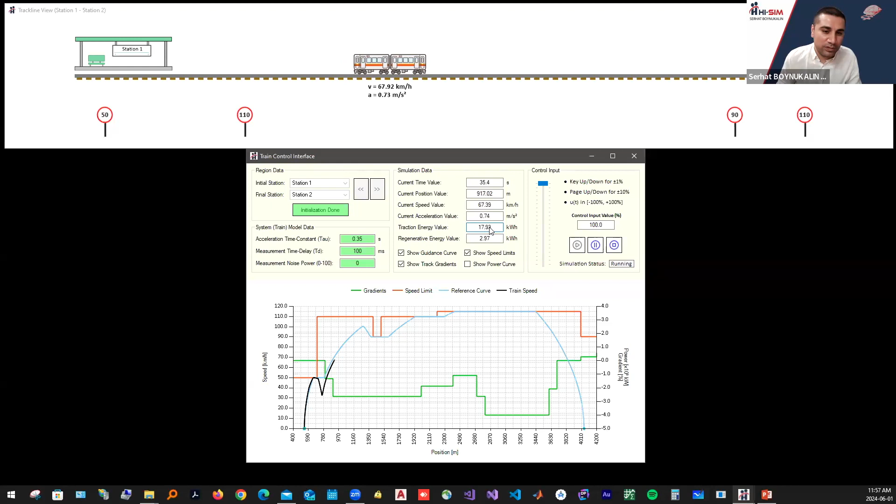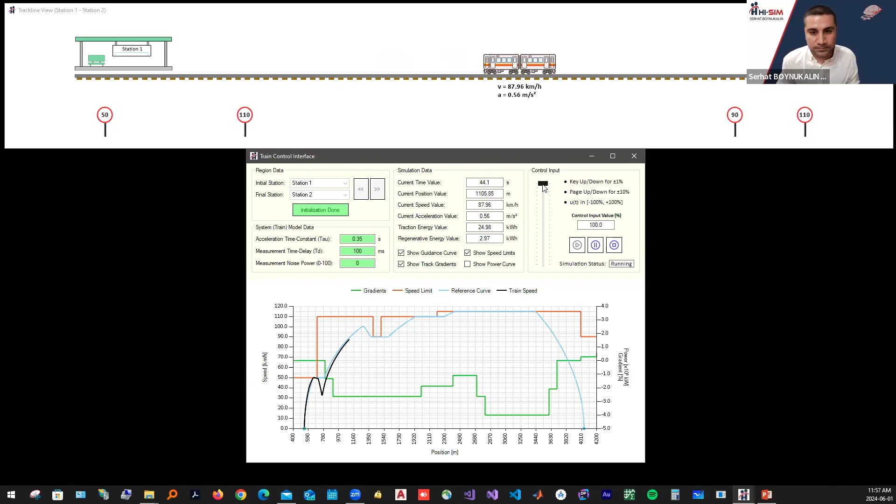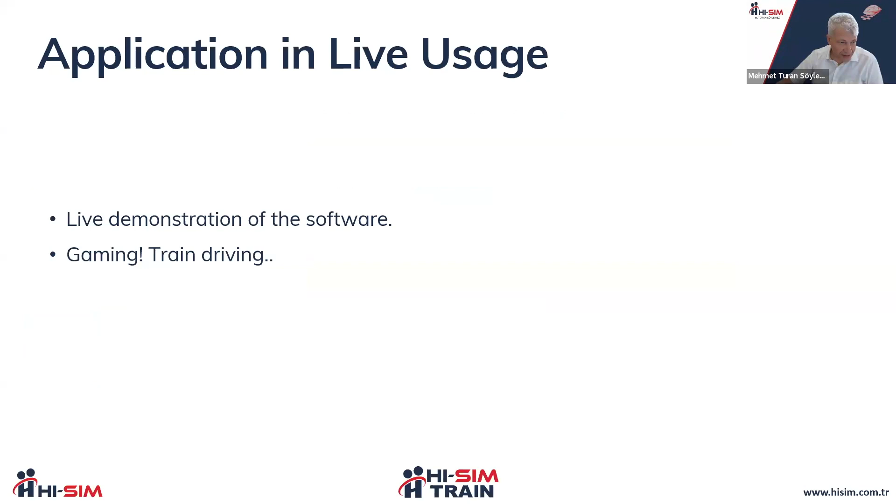So in case you do not have any questions, I'm going to give information about the licensing. Yep, let's stop it. It takes too much time. Allow me to share, just a minute. Page down. Here. Yes. Professor, if you want, you can continue to give information about licensing. Okay.

What we plan to do with this software is to have a freemium. We will have four versions. One is the freemium, and the others are premium for CBTC or ERTMS, and we also have an enterprise version of the software. The freemium, as the name suggests, is a free trial version of the program. There are not many limits, but you can just try to see what kind of data you can enter into the program with this version. And you can do some simple simulations.

However, CBTC or ERTMS signaling rules will not be able to be used with this version. And also, you will not be able to get a report because we consider such issues more like professional version issues. And there is a time limit of one week of usage for the freemium version. So if you wish to register for the freemium version, please register through the address given on the page.